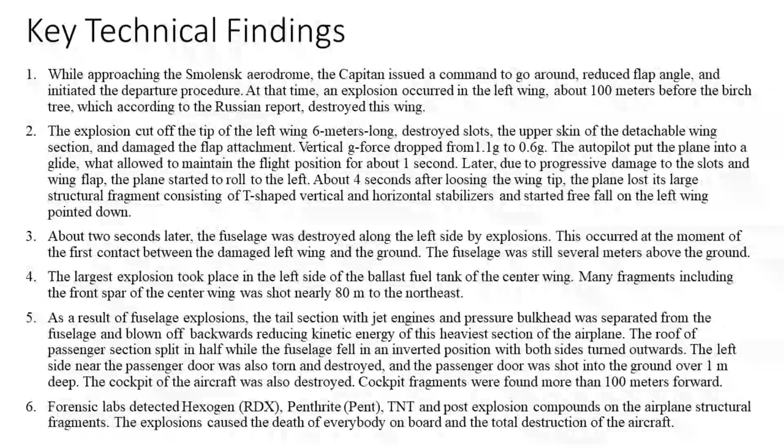Key technical findings of the report. While approaching the Smolensk aerodrome, the captain issued a command to go around, reduce flap angle, and initiated the departure procedure. At that time, an explosion occurred in the left wing, about 100 meters before the birch tree, which according to the Russian report destroyed this wing.

I put a small model so you can understand. This is the model of Tupolev 154M, and this is the part of the wing that was separated due to explosion 100 meters before this tree. This is about 9% of the lift force. And there are many situations in the past where due to some engine explosion, for example, such portion of the wing was lost and the airplane landed safely without any problem.

In this case, of course, it was a charge inside of the wing that exploded, so it was not a very nice, smooth cut. But in addition to removing these 6 meters of the wingtip, the slots, which are at the beginning of the wing, and flaps were also damaged. Therefore, at the moment of this explosion, the G-force was registered to drop from 1.1, due to the fact that the airplane was departing, to 0.6, which means it lost the lift force.

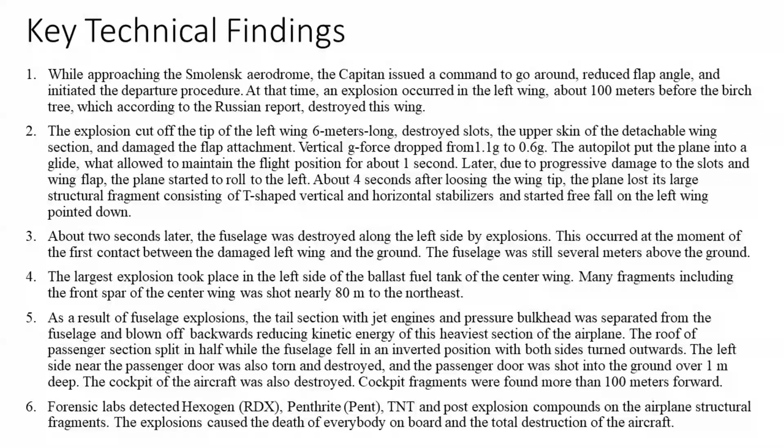Other things, of course, would be the whole destruction, the whole penetration, and the fragmentation of the whole airplane. Forensic labs detected hexogen, which is RDX, pentrite, TNT, and post-explosion compounds on the airplane structure fragments. The explosions caused the death of everybody on board and the total destruction of the aircraft. I would like to show some pictures, examples of the evidence.

Due to the explosion, the material not only can store the traces of the chemicals that are producing the explosion, but also they deform in a particular way. We can see on the top left picture so-called post-explosion curls on that wing that was separated at the very beginning.

We have also made simulations of these particular theories from Russia, and we found that if really the airplane would hit the birch tree of 44 centimeters diameter, basically the wing will cut the tree cleanly with some damage to the slots and leading edge. But no part of the wing will be separated.

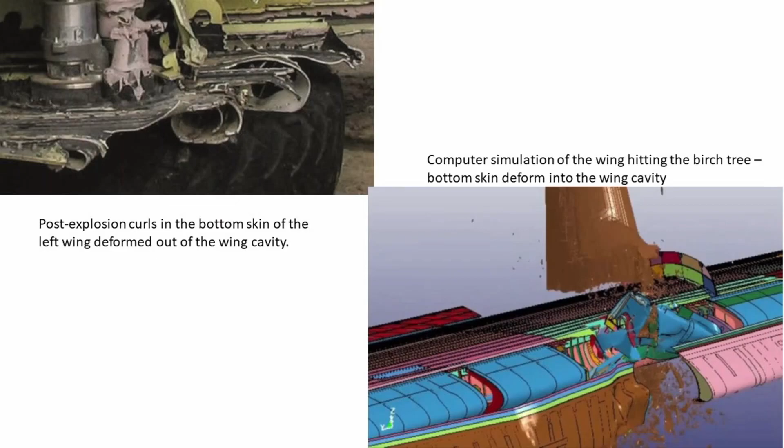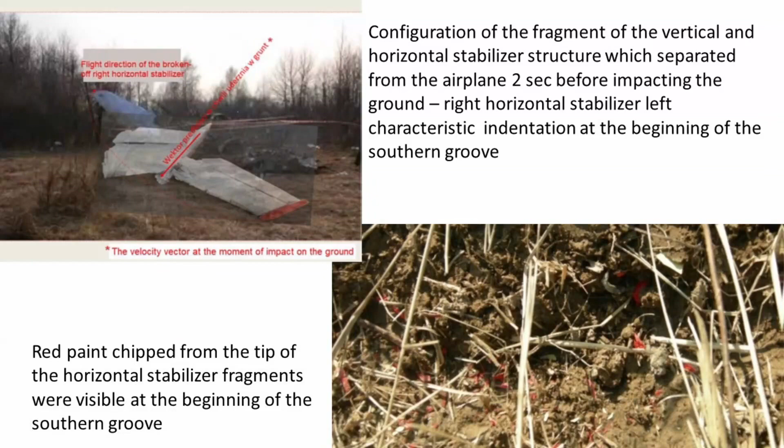The impact of this vertical stabilizer was very interesting, and this is quite new to many people right now. In fact, in the MAC report, people took the proper evidence, taking pictures, and they found that on the grass, on the south groove, there is paint, and that paint is from that end of the horizontal stabilizer. This was the only paint on that part left over after the separation.

And this basically hit the ground, like you can see on this picture, and then disintegrated and moved forward. So we know that the south groove was done by separate parts, nothing to do with the airplane as a full body itself. We found the traces of fragments left on the ground. You can see the path of flying of this part. It was quite random. It was rotating and flying like an aerodynamic small airplane, but still falling down, and dropping the fragments of that part on the grass.

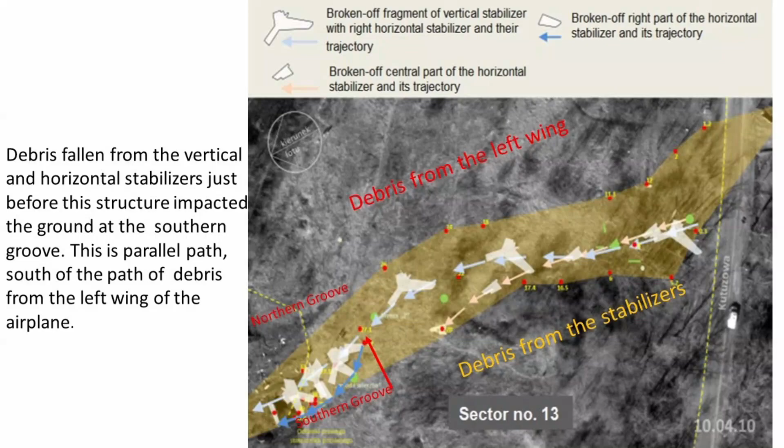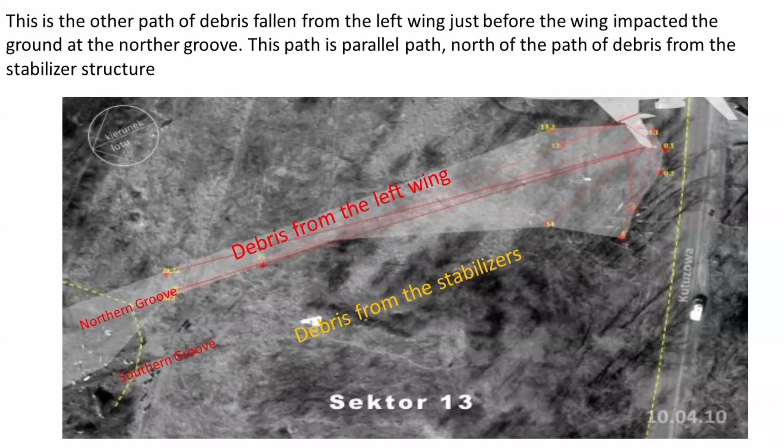Parallel to that, the second path was done from the debris from the left wing, which was also damaged, and therefore, due to aerodynamic forces, dropped from time to time pieces of this left wing in a parallel fashion and eventually hit the north groove. The first point of the north groove is the piece of the exposed metal sheeting cutting into the soil, as you can see, and of course sheared out very quickly.

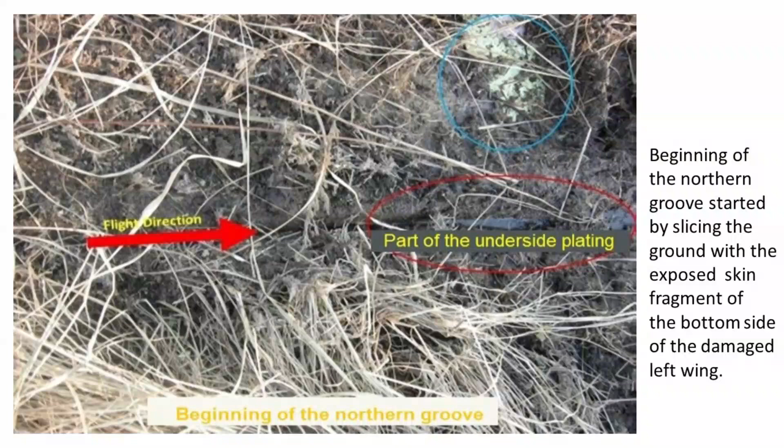Based on that, we can identify the orientation of the airplane, which basically hit this way with minus 90 degrees orientation in terms of rotation about each axis and nose down. If there would be no explosion, this would be that type of destruction through the crashing. But before it happened, soon after the airplane touched the ground with the left wing, an explosion happened.

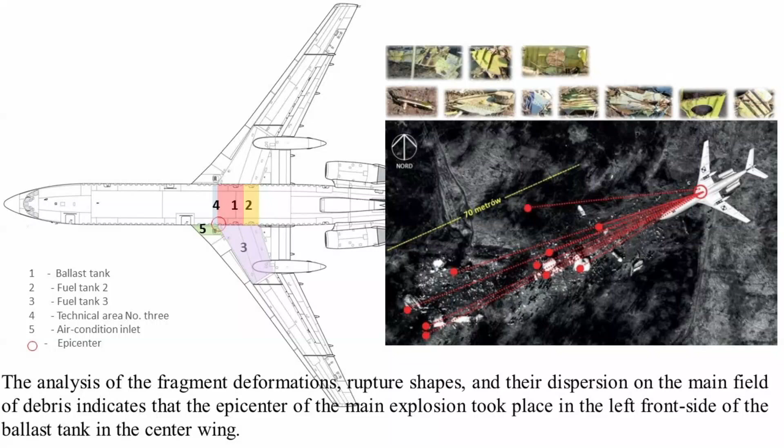This is the epicenter of this explosion looking from the satellite picture. Within 1.5 kilometers, there were several dozen witnesses who heard the sound like thunder. They couldn't see the airplane at that time, but they could hear the explosion. We know that from that location, the parts from the particular location of the fuselage, which you can see on the left front part of the ballast tank, were pushed forward and dispersed all over, as you can see in this picture from the satellite.

Of course, at the same time, the roof of the airplane and the whole body of the fuselage was fragmented. We were able to put together basically 90% of each side of the airplane and 66% of the roof of this airplane. We found a number of curls and petals, post-explosive signature deformation of the skin of the airplane, and 4 concentrations where most of the shock wave was pushing out from this fuselage: near the cockpit, near the kitchen, near the center wing, and near the pressure bulkhead at the end.

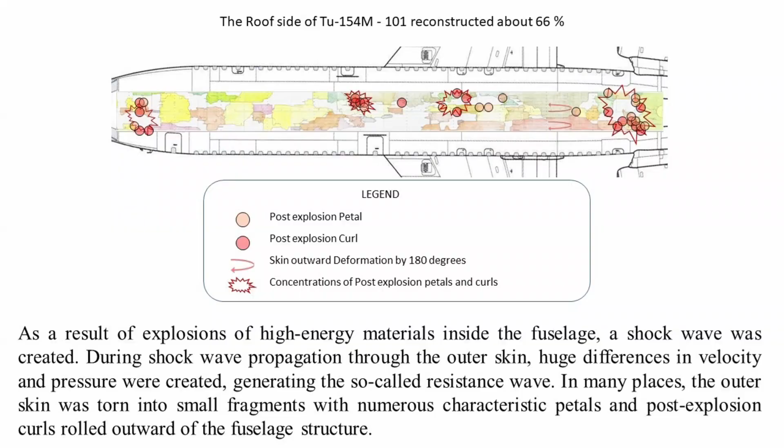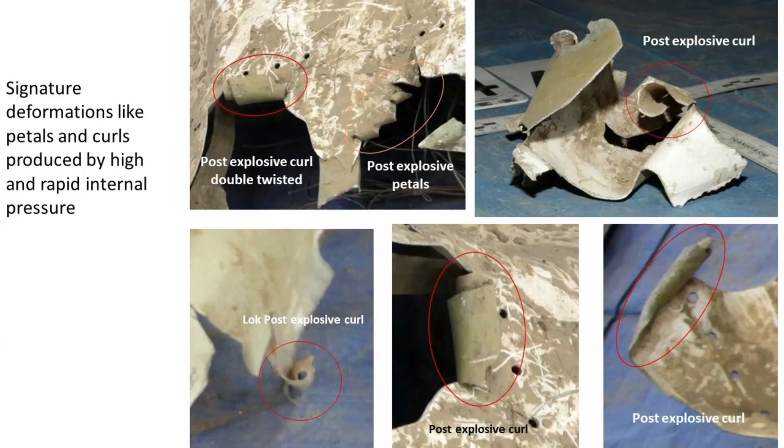These are the examples of those curls from the roof of this airplane. They are twisted a number of times because the shock wave is breaking the material and with high velocity is pushing out, so there's a big difference between the particular point of this metal and the rest of the metal, and therefore that rolling function of this shock wave. In fact, I can tell you that similar curls are in MH17. We found them due to the explosion outside of the nose of the airplane. So this explosion doesn't necessarily need to happen inside, it could happen outside as well.

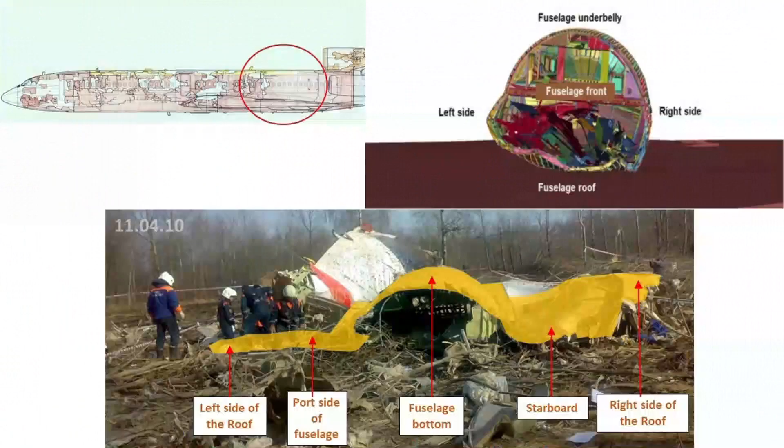A very interesting example of the internal high pressure we found in a particular location, which is the passenger part of the fuselage. This part didn't fragment into many pieces. In fact, it only broke the roof along one stringer and opened the roof before falling in the inverted position down to earth. That shows that the explosion needs to be in the air, because if the fuselage hit the ground first, you would see the situation in the top right picture. The roof would be indented inside the passenger space and would not be able to spread nicely outside.

But it was spread nicely outside, and you can see on this yellow area, which we highlighted for you to easier recognize, the spread of this roof: the left side of the roof, then port side, which is the left part of the fuselage, then fuselage bottom, then starboard, which is the right side of the fuselage, and the right side of the roof.

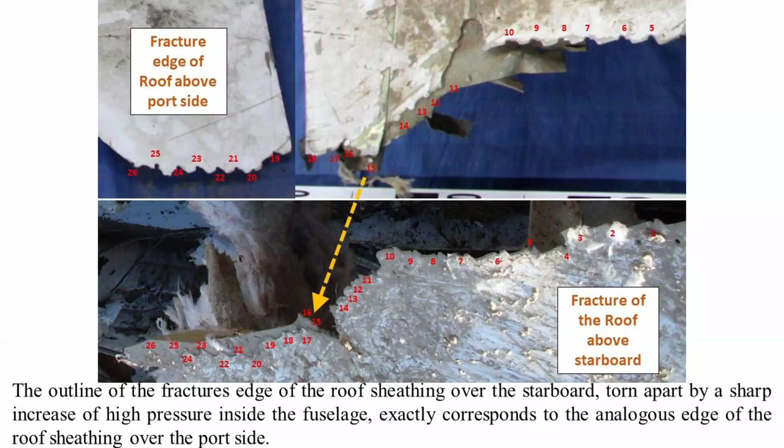If you examine the fracture edges of the roof, you can see there is no material loss, and basically the material opened along the rivets which were connected to the stringer. This typically happens due to hoop stress under high pressure inside the cylinder. So we could put it back, in fact, and fit together the whole fuselage, and there would be no damage.

Okay, it happened so beautifully. Well, the officers of Russia immediately realized, the same way as we do, that this is very strong evidence and visible from satellites. You don't need to go there to see this big item. So on April 11th, which is one day after, they removed everybody from the field at 4 or 5 p.m. and started to cut this roof from that particular part of the fuselage.

In fact, those pictures were taken by journalists, Russian journalists, who published them in the newspaper the next day, saying, look, our heroes are working so hard to recover most likely victims which are over there. Well, it was not recovery, this was cover-up. They cut the roof into many pieces and did not acknowledge this in the MAC report or any information that is officially published.

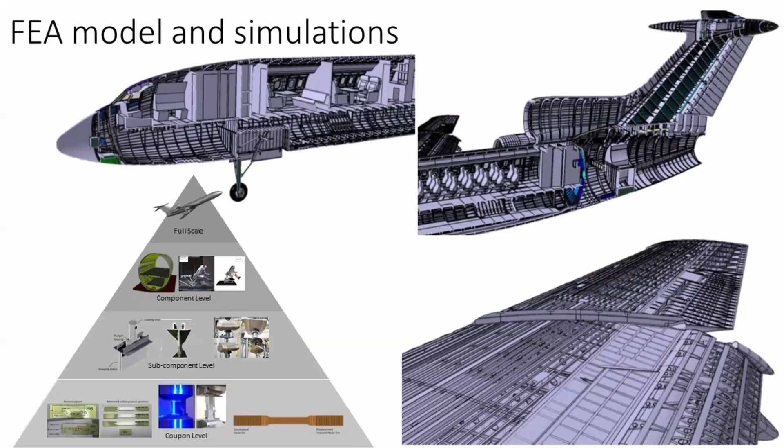Well, we made a lot of effort to answer any question. We have built, together with the National Institute for Aviation Research, a 33 million element finite element model with inverse engineering using the twin identical airplane that was used by the government of Poland. We also tested every piece of the material in this airplane, so we have a very accurate ability to test any scenario. We could put it down into the ground, fly into the birch tree or another tree, put explosion elements, see what happens to passengers. We can get any answer.

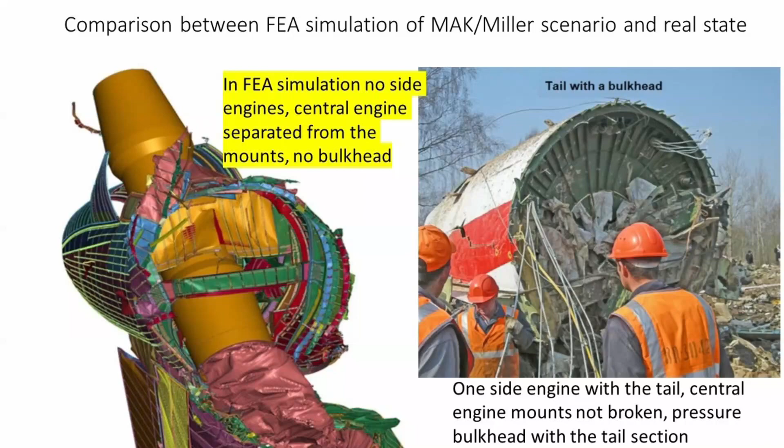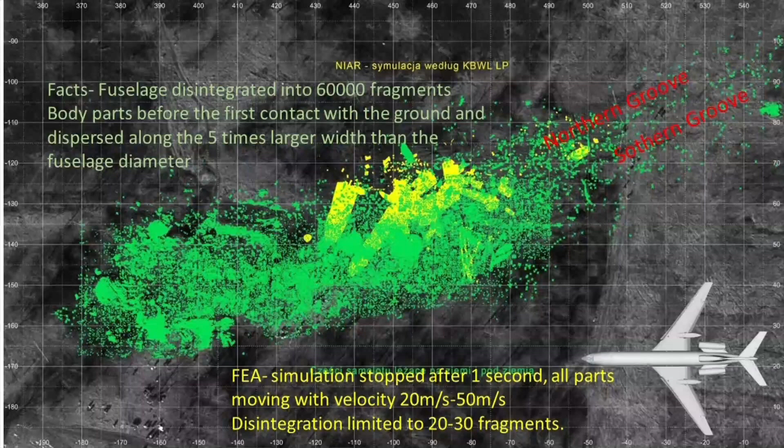Overall, we can calculate that there is not enough energy in the system of the airplane by its own to generate 60,000 fragments, as you can see on the satellite picture, all over this area. Basically, you need an extra source of energy, and obviously this extra source of energy is explosions.

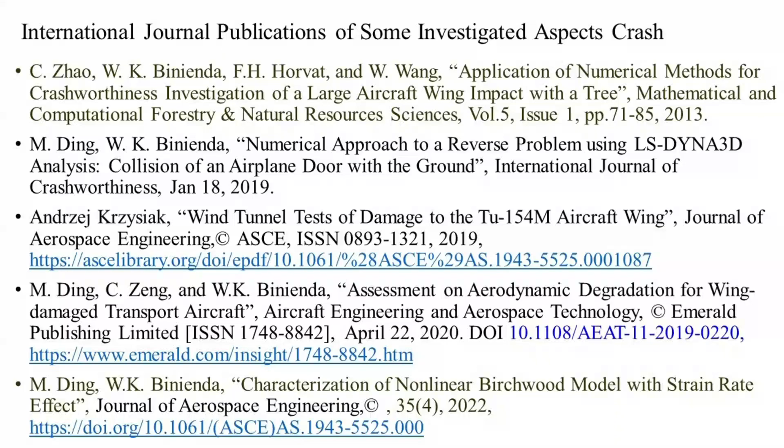Some scientific aspects done by me and my colleagues were published in peer-reviewed international journals, and I can tell you 3 of my graduate students got PhDs within these 12 years working on the topic of Smolensk. All 3 are Chinese, and all 3 got very good salaries and were invited back to China. They are now prominent professors in China. I asked my colleagues in China why the Chinese government has so much interest in this topic to hire 3 people from one school back to China. And they said, well, we have a neighbor that we need to understand, and this will help us to do it.